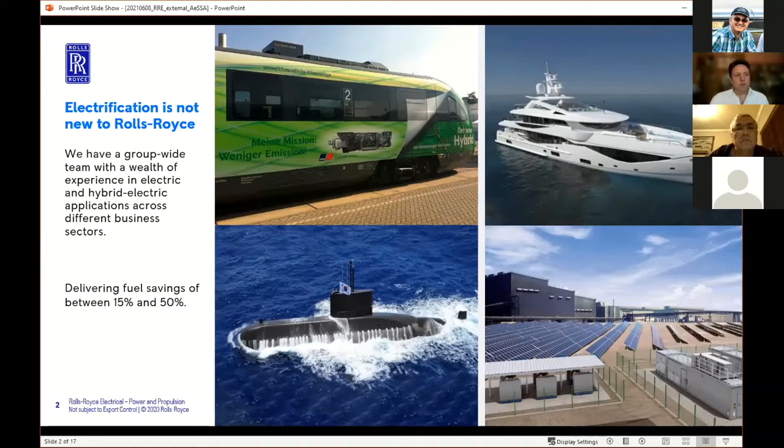And that actually gives us quite a number of unique capabilities, because on the journey to electrification, we're really, I wouldn't say rewriting the textbooks, but we are basically opening up a huge amount of opportunities to really redefine aerospace propulsion systems, but also redefine the platforms, because we can apply where in the past we had thermal engines. We're also bringing battery systems, high voltage battery systems, and hydrogen fuel cells into the mix. So suddenly you have a situation where you not only have the traditional thermal engine to provide energy, you also can combine that in a number of different ways with batteries and hydrogen fuel cells.

In the middle, which is one of the key aspects, is the power distribution and the protection systems, fault protection and the power conversion. So, again, working from alternating current and distributing that through the platform in the safest possible way, but also in a way that actually makes it possible to meet the earth and lightning and EMC requirements that we have on a platform, which is quite different from something that we have in the industry today. And we combine those two aspects, or those two groups of technologies, and bring it then forward onto different platforms.

Now you can see there on the right-hand side some pictures of some of the platforms that we already introduced. There's two ones in there specifically in the aerospace sector. The one is the hybrid electric flight demonstration system that I'm leading the team here in Germany, which you can see in the top left-hand corner of that box. And then on the bottom right-hand corner of the box is some very schematic representations of Team Tempest's activities on the 6th generation fighter program in the UK, where Rolls-Royce is leading the power distribution and power generation platform.

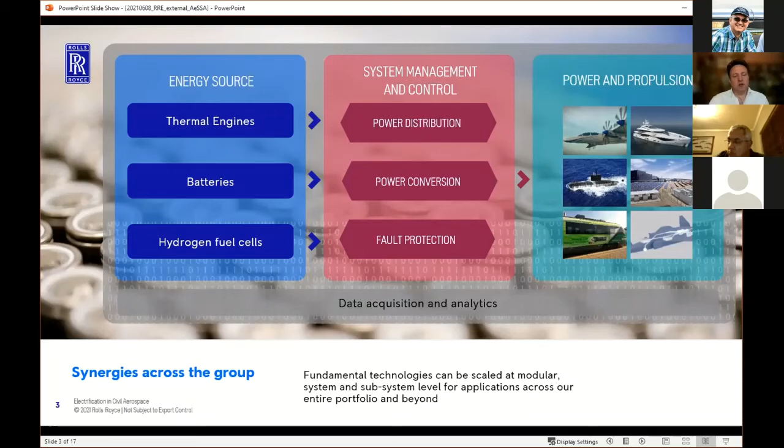So the key aspect for us on this journey is that we bring technology in that can be really scalable and modular. So we can bring systems to the market, and we have to bring systems to the market from component level through to subsystems and complete full systems. And there's quite a wide range just in those pictures on the right-hand side. We're ranging from 100 kilowatts through to the 5-6 megawatt type solutions. So it's a very broad range of applications. And we're trying to bring our technology in to make that really scalable and modular to allow us to apply to the widest number of potential platforms.

So why are we doing this? There's a huge move in the US and the EU to push the so-called Green Deal forward. And we have the very, very aggressive targets from both the EU Green Deal, but also from the ICAO to reduce the CO2 footprint of aviation dramatically until 2030 in the case of the EU Green Deal, and 2050 in the case of the ICAO package. And we believe very strongly that we have the opportunity here to bring this disruptive technology into the market.

We're seeing a very strong trend towards mega cities with the continued population growth. We're seeing a lot of challenges specifically on the short-range regional transport market, where there's a huge amount of push politically to get to CO2 neutral means of transport. But we also see that in a lot of the European countries, eastern and western seaboard from the US and the Asian space, that the infrastructure is just reaching its limits. It becomes extremely difficult to put more traffic onto roads. Specifically in Europe, it's very, very difficult to put additional rail links in place. There's a huge, long bureaucracy process to do so.

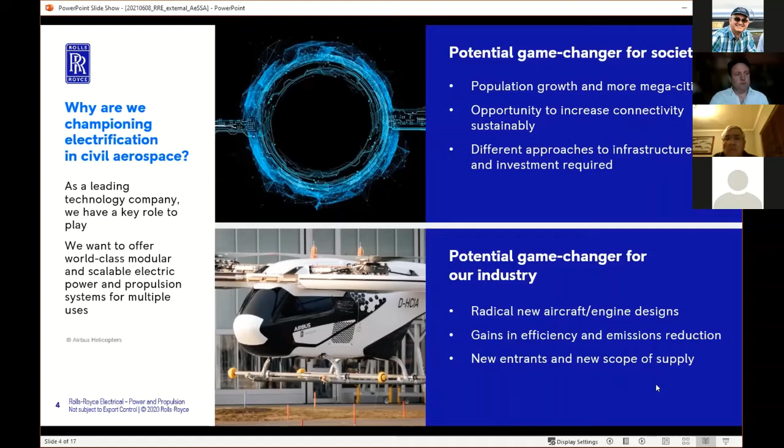We are looking to inject technology in terms of component design changes and new lightweight materials to really push the needle forward there. So we're talking about almost a factor 2 increase of power density that would be needed to deliver a competitive platform.

Similarly, in the electrical space, when you try to combine the electrical system with gas turbines, there's a huge push towards higher temperature materials in that domain, and also very simply qualifying a lot of the electrical materials for the aerospace market, because most of them are simply not available through aerospace supply chains.

And then the last item we're very strongly focusing on is fault tolerant design. Clearly, if you start doing numerical fault trees at platform level or propulsion system level, there are different ways to actually get to the rate that you need to be flying. However, we're seeing that a lot of that involves redundancy, but redundancy brings a lot of weight. So we're looking at ways of putting fault tolerance into the electric machines and the power electronics, so that we can operate these machines.

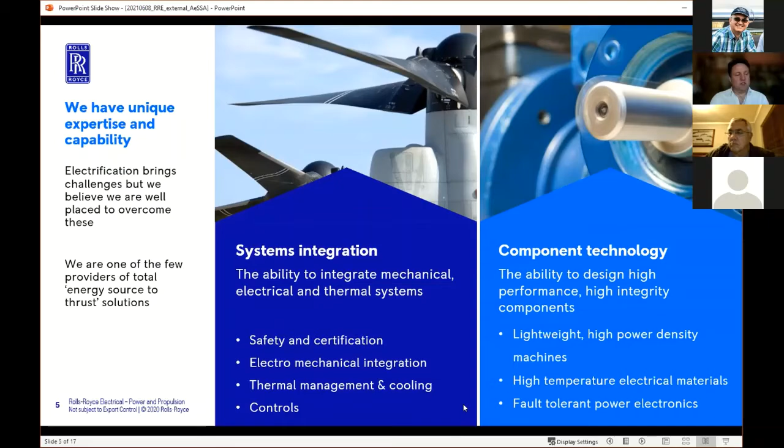And lastly, but not least, controls. Just creating control systems with design assurance level A or B in many cases is again one of our experiences that's needed to do this. And that's specifically where we see, on a lot of the startups, the big deficit is understanding of what it takes to do these complex software integration packages.

Right, so where do we think? We believe strongly that this market will be dipping from the bottom. It's very clear when you look at wide body aircraft and large biz jets. Just reflecting, you mentioned previously some of the programs we're involved in. You reflect on a BR725 engine on a Gulfstream 650. When we run that on a test bed here, we're generating 18 megawatts of shaft power on that gas turbine.

Now, if you imagine the size of an 18 megawatt electrical system today, it's very clear that there's a long road to travel before we try and get to those power levels. But in that segment, we're already seeing today a very strong push towards the more electric engine and the more electric aircraft platforms. The Boeing 787 was one of the first ones. After that program and some of the complications it had, there's a bit of a lull, but we now see a very strong push again in the next generation of platforms towards more electric.

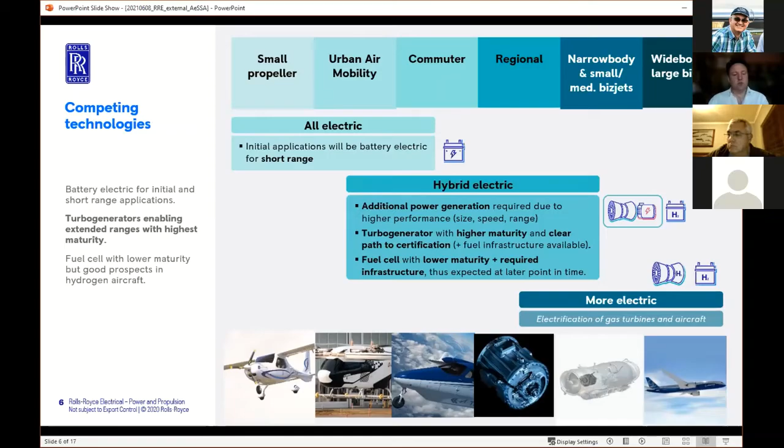And then as we move down to the smallest end of the market, the small propeller market or urban air mobility, there we believe the initial applications will be all electric. They will be short range, and they will be specifically in the urban air mobility market and small propeller market. Again, there will be a sub-market group there where we will go into the hybrid electric solutions. So there is a clear cascade here that we believe we will follow, and we are focusing our projects to support those different market segments and timelines.

So when we talk about small propeller aircraft, these are typically the 1 to 4 seaters, CS22 type aircraft, where we're seeing that noise is a major driver. Specifically here in the US and the EU, there are very significant noise restrictions that limit the operation of these aircraft. So breaking through those noise limits, basically getting the propulsion system to a level where it operates well below those limitations, enables those platforms to fly many more hours.

But also low emissions, specifically smaller platforms that are landing at airports close to cities. We're seeing a big push towards that. There's also, interestingly enough, from a lot of training organizations, both civil and defense, a push towards low emission training. So we see a really good market there, and that's a 50 to 300 kilowatt type market. And again, we're talking about first products early in the second half of this decade already. So you're looking at 26 to 28 for market entry.

Urban air mobility, and this is a really exciting prospect. It's an incredibly large opportunity in the market. And again, the market is split between the so-called intercity, i.e. taking the e-taxi from the local airport down to the city center. There we see all-electric applications.

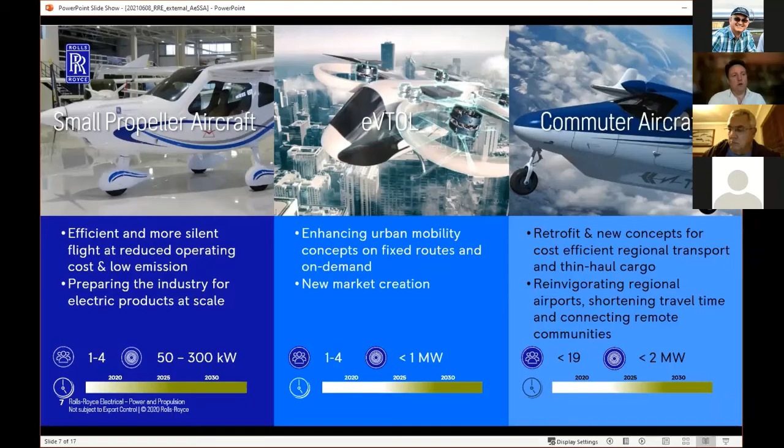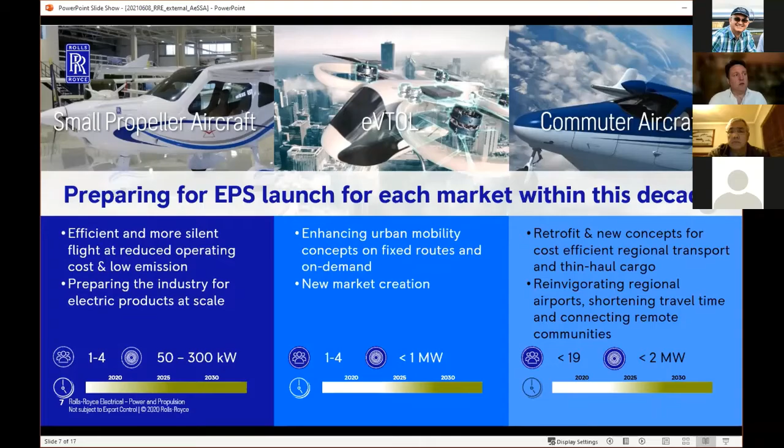So these platforms, as I mentioned before, are typically below 19 seats to the CS23 regs, and roughly around 2 megawatts at platform level. And as we mentioned before, Rolls-Royce is active in all 3 of these markets, and we are looking to deliver product into this market space within this decade. Right.

So on the component side, we're seeing a lot of challenges. You may be aware that, for example, on the electric machine side, we are currently running a 2.5 megawatt electrical generator system that was originally designed for the eFan-X program. So we're powering that with an AE2100 gas turbine and generating 2.5 megawatts from that. It's an incredibly compact machine, really high power density levels.

But that machine was designed around the rotating shaft speeds that were available from the 2100, and is clearly designed as an additional unit that you drive from the propeller gearbox. The next step now is to embed those electrical machines fully into the gas turbine, different thermal environment, different speeds, sharing oil systems, sharing cooling systems, potentially sharing control systems to really get the power densities up.

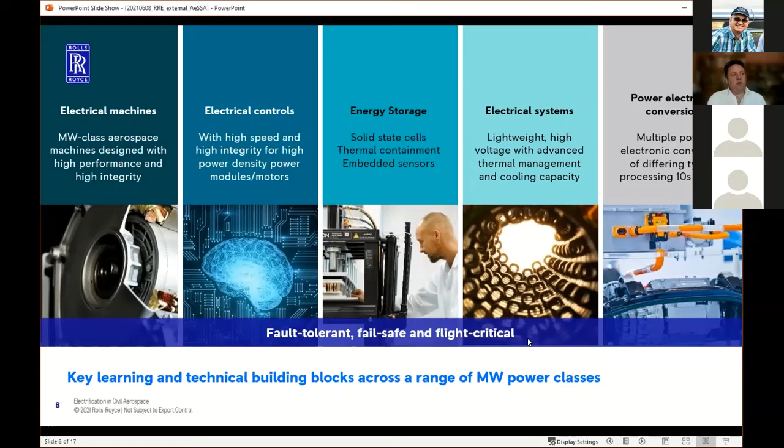Right, so if I move on to some of the applications. This is just an overview of the platforms that we are currently flying on an experimental basis. It starts off with the classical Magnus eFusion aircraft, CS22 aircraft below 800 kilograms. It goes on to the Extra 330 LE. That aircraft is parked just around the corner from us here in Strausberg.

A company called ARPAS is one of our partners. It's the previous world record speed holder for electric flight. It flew 330 kilometers an hour, something. And we're preparing that aircraft for a 2nd iteration with an updated system and a new battery system for flight testing. Then we also have things like the Flight Design F2E. Again, that aircraft just went through a flight test program, looking towards production.

But there's also, for example, on the hybrid side, a very interesting system with Tecnam on the H3PS. We've introduced a small hybrid system as a booster onto a Rotax engine to increase power delivery during takeoff, but also cruise, enabling the opportunity to cruise all electric and optimize against CO2 and noise.

The Airbus CityAirbus is another platform that we had flying until about the end of last year, the Airbus I've mentioned before. Although you can see there are 4 grouped propulsors, they're actually stacked on top of each other, so there's a total of 8 electric machines there. That platform did a number of flying hours in Ottobrunn in Munich, and is still continuing flying at this point.

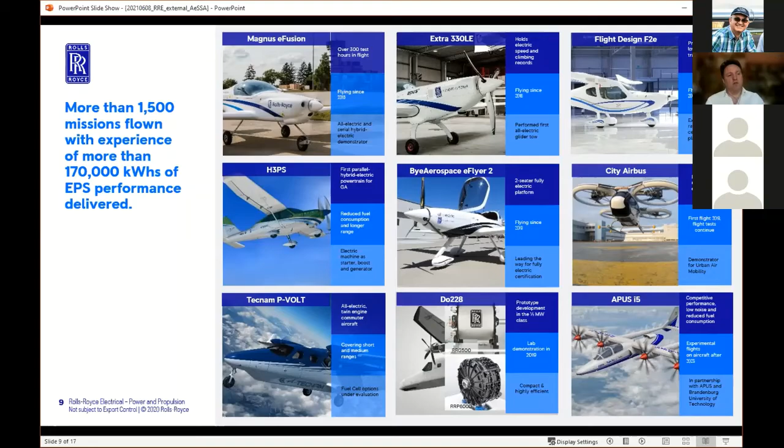Tecnam P-Volt, as I mentioned before, specifically with Widerøe, we're working there to look at an all-electric short-range aircraft. And then we had a demonstrator program converting a Dornier 228 with 2 electric machines on an all-electric basis, and then on the bottom right-hand side, the current hybrid electric demonstrator that we're working on in the APUS i-5. And I'll be talking about that specific program on the next slides.

So the purpose of this program is really to be, firstly, our flagship. This is the most complex hybrid electric system that's being worked in the industry today. It has a gas turbine and a high voltage battery system in it. We defined the program to investigate a number of aspects that a lot of articles are written about and claim some benefit, but very few have actually demonstrated. It's designed to investigate certain aspects of distributed propulsion.

This platform will also have extremely slow turning propellers. We have 9-bladed propellers turning at 900 RPM. All our noise calculations tell us that we're going to be around the 20 dB mark on those propellers, enabling really quiet operation of the platform. Similarly, with the embedded gas turbine, we've installed some new patented noise reduction technologies to get the gas turbine noise down.

And we're basically looking at the whole aspect. We're using a flight clearance investigation program instead of a type investigation program. So we designed the flight clearance program as if we are certifying the platform and agreed that 100% with the local authorities here in Germany, the LBA, the Luftfahrtbundesamt, with the intention to practice and test what it takes to certify a hybrid electric system.

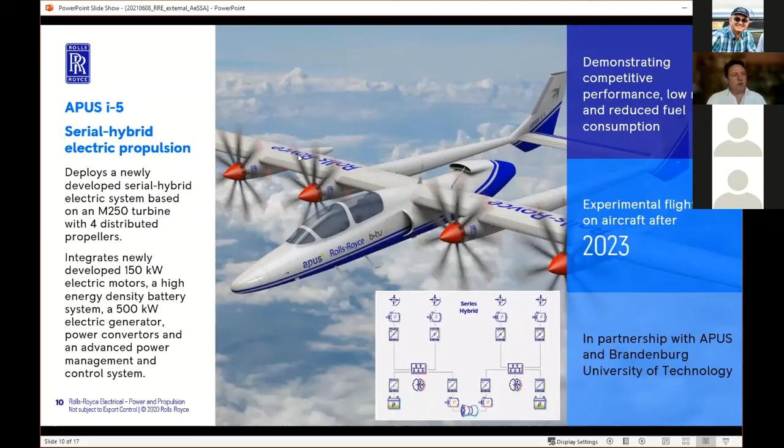If we look at the breakdown, that's a map of Brandenburg that you see there with Berlin as an island in the middle. So we at Rolls-Royce, through our anchor location here in Dahlewitz, are doing the whole power plant integration. So bringing the electric system that is coming from Indianapolis, where they're doing system integration, distribution protection, some of the

control system. We then bring the generator that's being done by our site in Trondheim into play. Our team in Singapore is doing the power electronics and the energy storage system, and our team in Budapest is doing the electric propulsion unit motor. And as I say, we bring all of that together in Dahlewitz into a power plant.

AeSSA is a small company that specializes in prototype manufacturing and previously also did STCs, conversions of airframes. They are helping us with the integration of the platform, but they will also be building the Ironbird and the actual flying airframe for us. We did a lot of work with them to see if it's worthwhile converting an existing platform, but ended up in the end designing a really dedicated platform for us.

And lastly, BTU Cottbus, who's supporting us specifically on the safety side, but also doing a lot of work for us on the system modeling side and the test support.

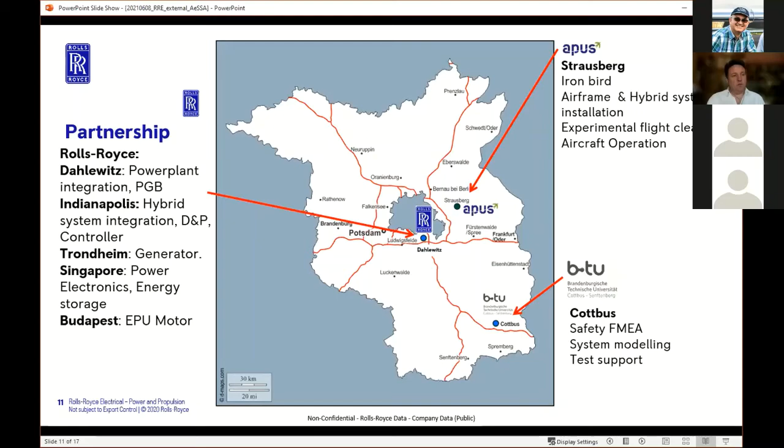Our clear project charter in this case, absolutely number one, is safety, both electrical safety and safety of flight. We are very conscious that in the CS-22 and CS-23 environment, the regs do not force you to do numeric safety assessments. It only requires qualitative safety assessments. And what we're doing in this space, we are doing a numeric safety assessment, which is quite a challenge because it's really pushing the data availability for the electric systems very hard.

Of course, there are some legacy data available through mil handbooks and other places, but the reality is that there's not a lot of industry experience, even with permanent magnet machines and solid state switching power converters. So we're bringing those two aspects very strongly into the integration part. And on the power plant, for example, what we're doing here is a piece of work that defines the cockpit interface. So we literally own everything through the throttle levers and the interface, and we're trying to define and support industry standard indications for hybrid electric systems, because that's something that currently does not exist.

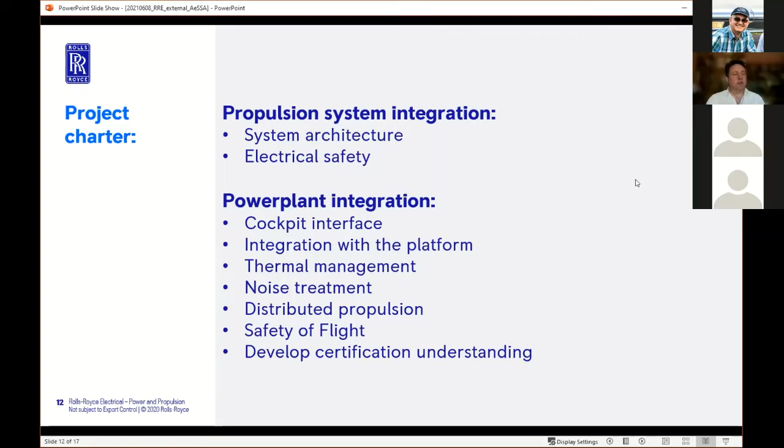Integration with the platform, I mentioned a number of times. Thermal management is a huge challenge with our distributed system. Noise treatment we've mentioned, distributed propulsion benefits mentioned. And again, as I mentioned, the development of the certification understanding and really practicing what it will take, learning what it takes to certify a system like this.

So we're doing this in 4 steps. We're having the component level activities, as I've mentioned before, distributed around our global team. That will basically peak in a component rig test campaign around DO-160 to look at qualification and test of a lot of the individual units and making sure that we get the FMECAs for those units sorted out.

We then bring that system together as a propulsion system where we integrate the electrical system. We will be testing that on a Copperbird facility. We have a facility in the US in Indianapolis, but also one in Cottbus that we'll be using. And then the next step is an Ironbird, classically bringing all the platform integration components into there. So power gearbox, the propellers with the pitch control mechanism, the installation, the inlet, the exhaust, putting all of that together. And basically the Ironbird is an aircraft without outer wing and tail pieces.

And then finally, in 2023, the aim is to go and fly on our aircraft level demonstrator, and we will be doing a roughly 200-hour platform flight test program to investigate a number of items on operability, but also on how you operate such a complex system, and confirming the basic performance parameters on the platform.

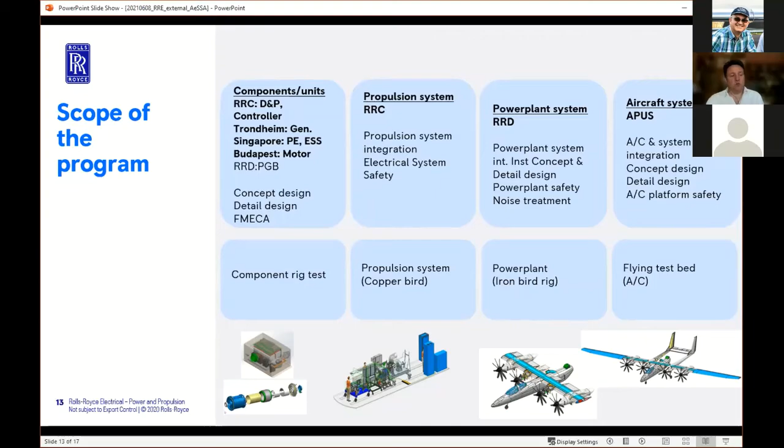But yeah, really making sure that we understand and can simulate not only the performance of the unit on a blue sky day, but also actually can model and simulate the failure of the unit and validate those test points with data. So here's a short view of that system on the platform, and it gives you an idea of the complexity.

We start off at the back with a M250 gas turbine, so we're using the strongest variant of the M250 system as an initial starting point. In front of that, which is not quite visible, there is a high-speed generation system. It's basically 4 electrical generators in one that feed through into the 4 rectifiers that you see in front. Again, so this is quite a, if you want to call it, standard approach.

We've not, in this case, for the first generation system, gone for full integration with the gas turbine and the electrical systems. You know, that is something that we're working on, very focused for the second generation. But you can see here just the space claim that you have when you compare the physical space of the gas turbine with the actual electrical system.

What you also see on the top there is a special inlet that was designed for the gas turbine that includes some patented noise reduction technology to get the gas turbine also below the 60 dB on that flyover point. So from the power electronics there, we then distribute the power through a distribution protection unit system. So again, high voltage solid state switches, and through this red network, we distribute the DC power through the aircraft. So that system is running at just over 1,000 volts.

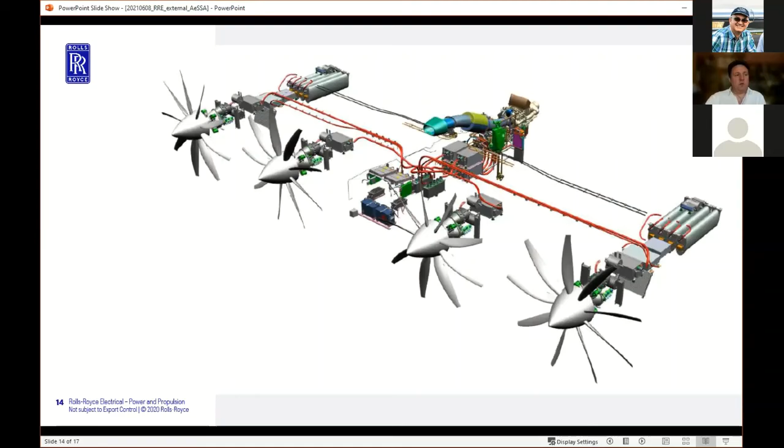So if we then look at one of the interesting aspects of this, if you look at the system distributed, when you look at the aircraft, you can see we are taking up a lot of real estate on that platform. And of course, that's one of the key aspects for the second generation and production systems, again, is really tightly packaging those systems, integrating those systems to make sure that we end up consuming a lot less real estate on this platform to give it the cargo and payload capability that it needs.

Right, so that's in a short nutshell, the key activities. As I say, I'm leading this program here in Germany. It's been a really interesting journey. Looking forward towards the 2023 timeframe, we're going to fly with this system.

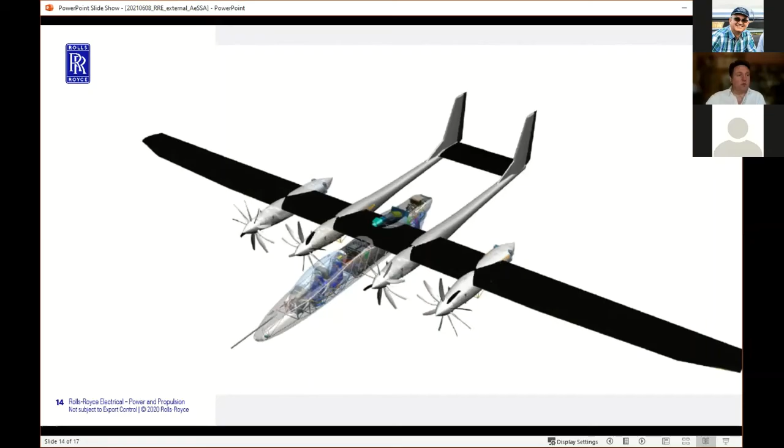But I just wanted to mention that we are working with a very strong group of universities as well, specifically here in Germany. I mentioned the Brandenburg Technical University in Cottbus a number of times. We also have very strong ties to the Technical University in Dresden and the Karlsruhe Institute of Technology. Now those three are the university technology centers for Rolls-Royce in Germany. All three of them are UTCs for gas turbine activities.